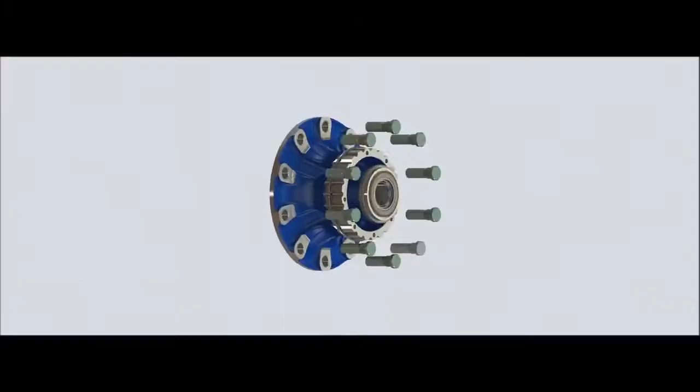We manufacture premium quality ductile iron axle end assemblies, wheel hubs, brake drums, brackets, and steering knuckles for trucks, trailers, and passenger cars. With more than 500 employees and 70% of sales exported globally, we are one of the largest auto parts exporters in Pakistan.

3 generations of the Rastgar family have contributed to the success of this enterprise, which has continued to grow on a basis of specialization, dedication, and customer service.

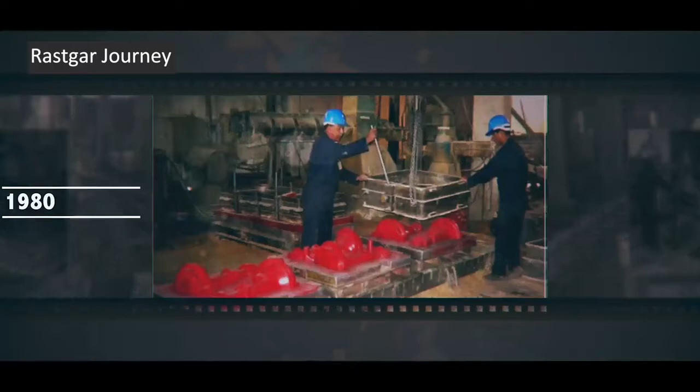In 1967, Imtiaz Rastgar, a 21-year-old graduate, established a foundry manufacturing grinding media for the cement industry of Pakistan. In 1980, Rastgar made a new foundry for the automotive industry for making axle housing and other components for the Pakistan tractor industry. By 1990, Rastgar established the nation's first ever private sector CNC machining facility.

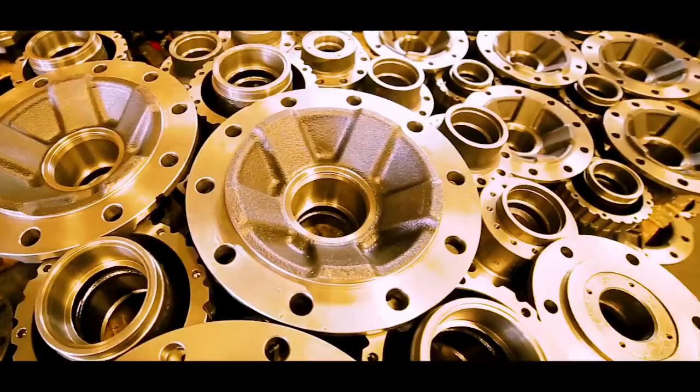In 1991, Rastgar produced its first machined wheel hub. Soon after, wheel hub became the highest selling product of Rastgar, and today we have produced more than 6 million wheel hubs for the OEMs and aftermarket.

In 1994, Rastgar pioneered auto part exports from Pakistan to Ireland and later to US and various countries in Europe. In 2005, the country's first ever high-pressure molding line was procured from Heinrich Wagner Sinto, Germany.

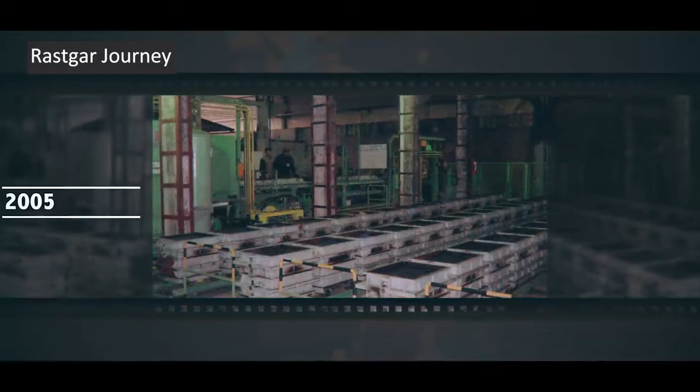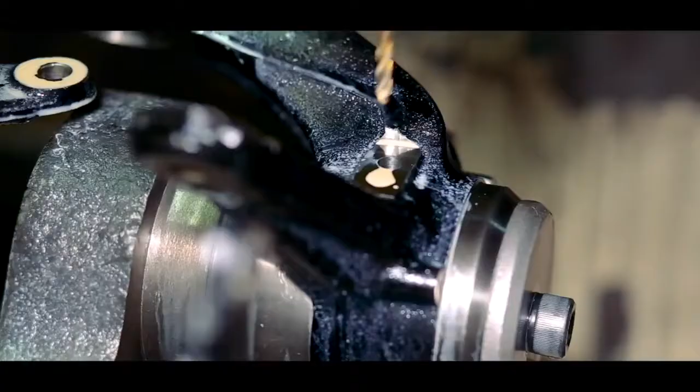In 2008, with collaboration of our technology partners from Switzerland, Germany, Holland, and Denmark, Rastgar successfully developed the steering knuckle of Toyota, making it one of the few companies in the world capable of producing safety-critical components. Later in 2016, Rastgar started production of steering knuckles for Honda.

At present, we export to more than 50 countries worldwide, and Rastgar has developed into an iconic brand, synonymous with quality and timely delivery. At Rastgar, all our operations are under one roof. This is what sets us apart from competitors.

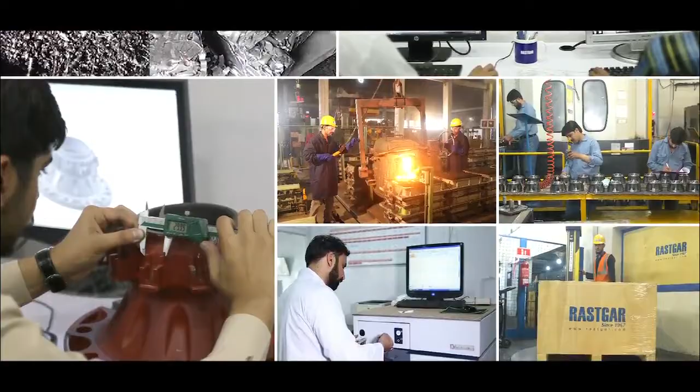From procurement of raw materials to product development, engineering, foundry, CNC machining, quality assurance, painting, till packaging, all are carried out in our own premises. Thus, we are able to maintain quality at each and every step.

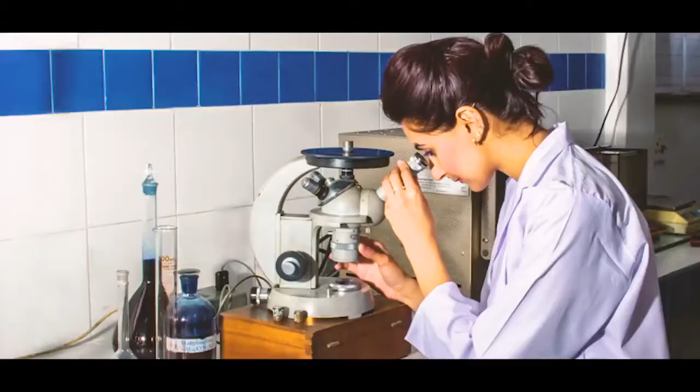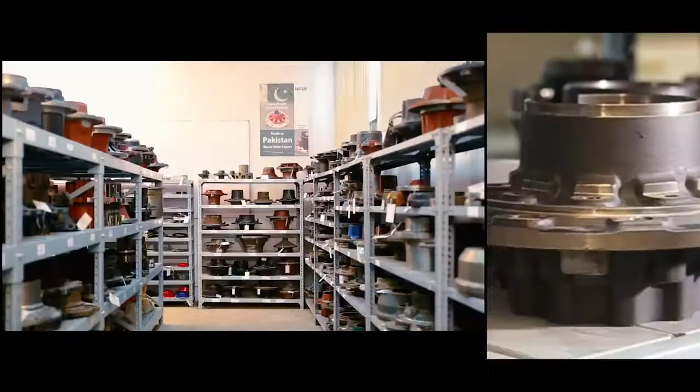Various renowned companies of the world are associated with Rastgar as technology partners. Our product development department is fully equipped to develop components according to customer specifications, as well as to engineer new components for customers according to application needs.

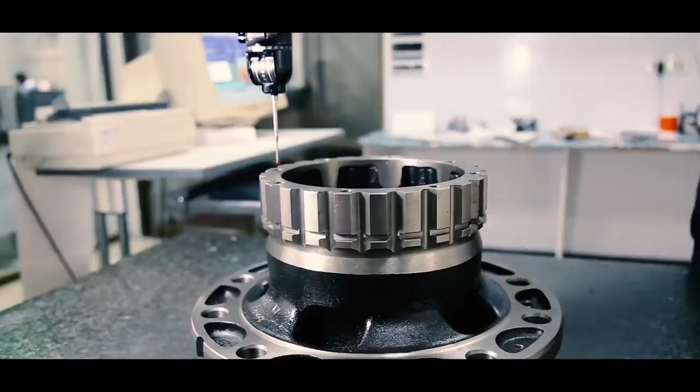Casting process simulation softwares like MagmaSoft and SolidCast are used before development of actual parts of all critical components. We offer rapid product development, and our off-tool samples can be developed within 21 days. All patterns are produced in-house.

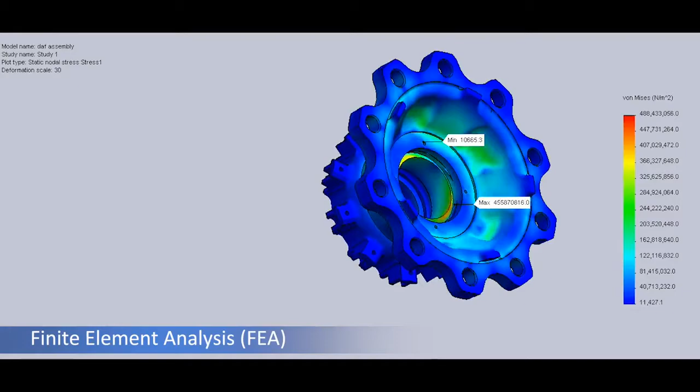In addition to CAD, CAM, and 3D modeling, finite element analysis, FEA, is conducted for testing the structural and physical strength of the components. In-depth knowledge of metallurgy and systematic statistical process control are at the heart of precision manufacturing culture at Rastgar.

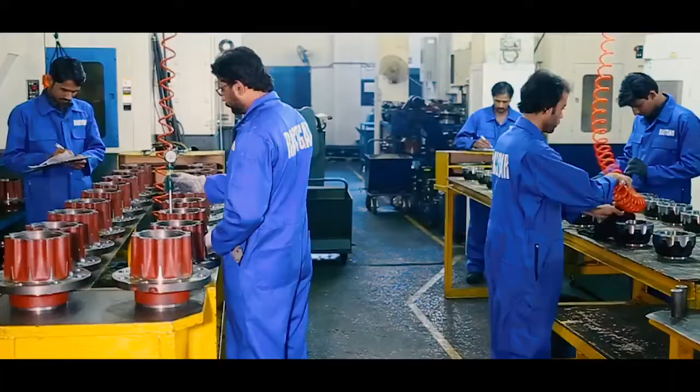Spread over 100,000 square feet, we have an annual capacity to produce 12,000 tons of premium quality gray and ductile iron castings.

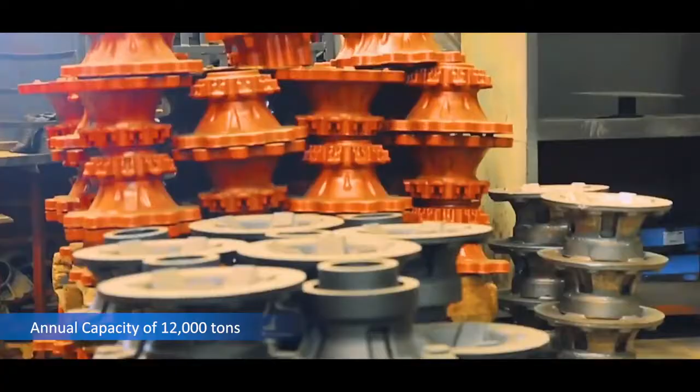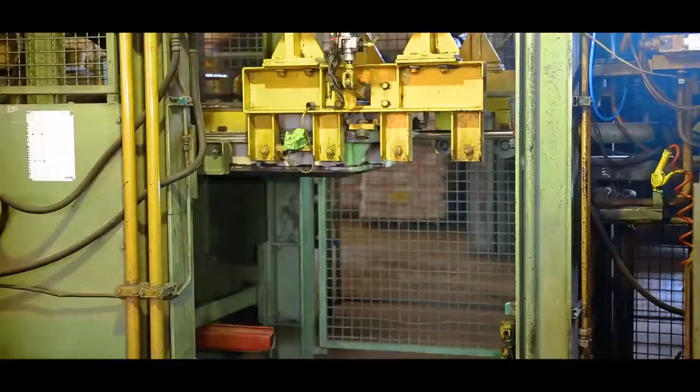Molds are made in high-pressure, fully automated molding lines. Sand preparation and conveying system are supplied by Eirich, Germany. Both molding and sand systems are centrally controlled by Siemens Process Control System.

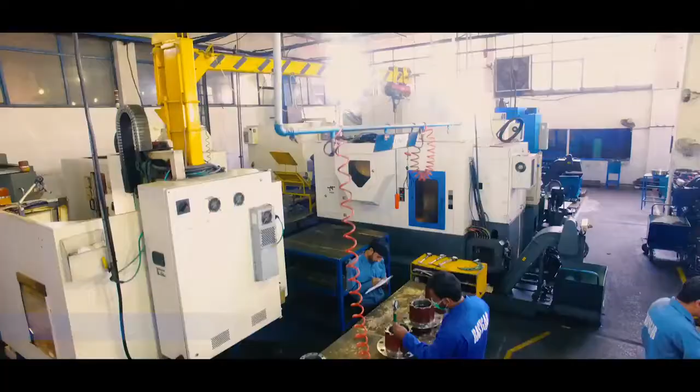Molten metal is supplied by 2 inductotherm furnaces with chemistry controlled by spectrometer, CE meter, and chill test. Special purpose machining cells have been acquired for high volume production. Special fixtures and advanced machining techniques are employed to ensure the highest level of accuracy, productivity, and repeatability.

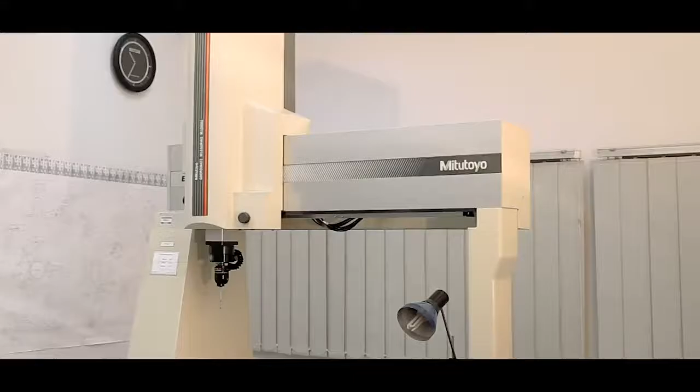Rastgar is an ISO TS 16949, ISO 9001, ISO 14001, and OHSAS 18001 certified company. Our QA department is equipped with coordinate measuring machines, surface roughness testers, ultrasonic testers, cryogenic testers, metallurgical microscopes, image analyzing softwares, and complete sand testing lab.

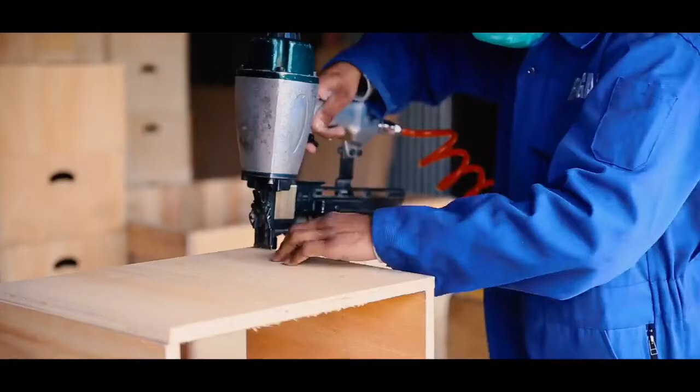We offer packaging and preservation of our products as per customer specifications. We always provide quality products, on time, every time.

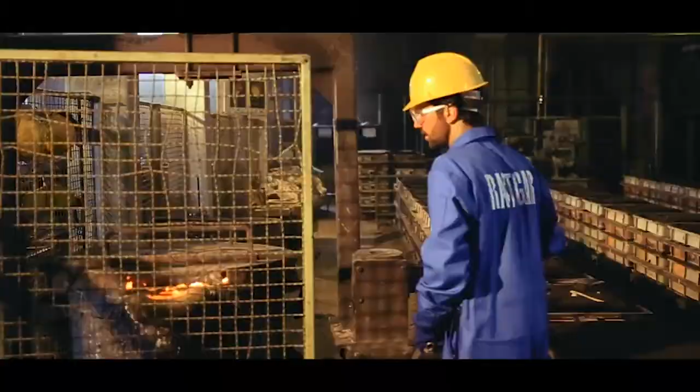Our technical staff has extensive experience in various foundry and machine shop specializations. We are associated with various international experts who visit us regularly for technical training and technology transfer. We have a culture of continuous learning, and frequent skill enhancement sessions are conducted.

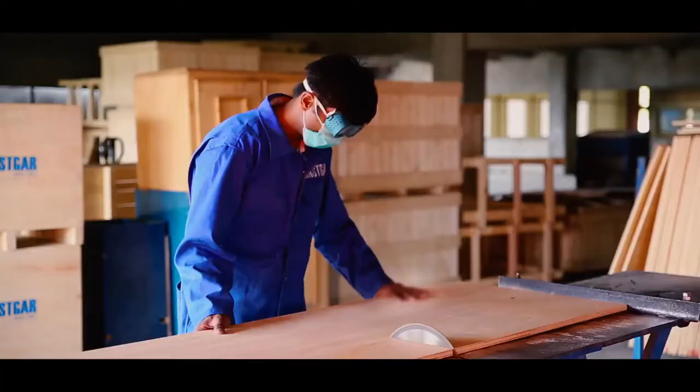At Rastgar, safety is a priority, as we value precious lives of our team members. We have a special focus on safety orientation and emergency response training.

We frequently participate in various international exhibitions to have a face-to-face interaction with our customers. Our customers acknowledge us for our premium quality, and we have received multiple quality awards in the past decades.

At Rastgar, we conduct business the right way. Our culture encourages professionalism and high ethical standards. We provide good working environment and training opportunities.

We continually facilitate academia-industry linkages and play our part in knowledge transfer and skill enhancement of university students through seminars and factory visits. We are driven to design an environment that inspires and empowers team members to reach the fullest potential of their creative and professional talents.

Apart from various financial and medical benefits, Rastgar engages its team members in creative pursuits, sports and fitness programs, and community service projects.

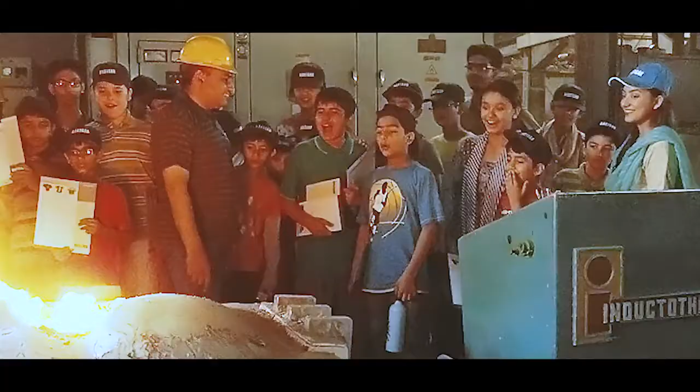We remain committed to a greener tomorrow. In line with our vision, Rastgar's ideal is the beautification of its environment, be it through elimination of wastes, recycling projects, or system optimization. Over the course of 50 years, from a small foundry to a recognized auto parts manufacturer, Rastgar has gone a long way.

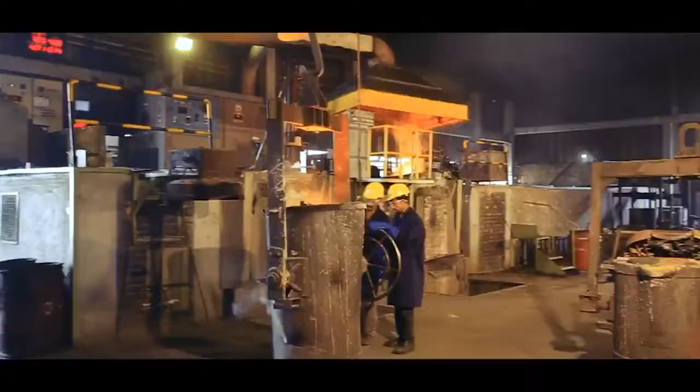Rastgar has gone a long way. While we are proud of our past, we are enthusiastic about our future, and we strive to make the world a more beautiful place through our products, our processes, and our people.